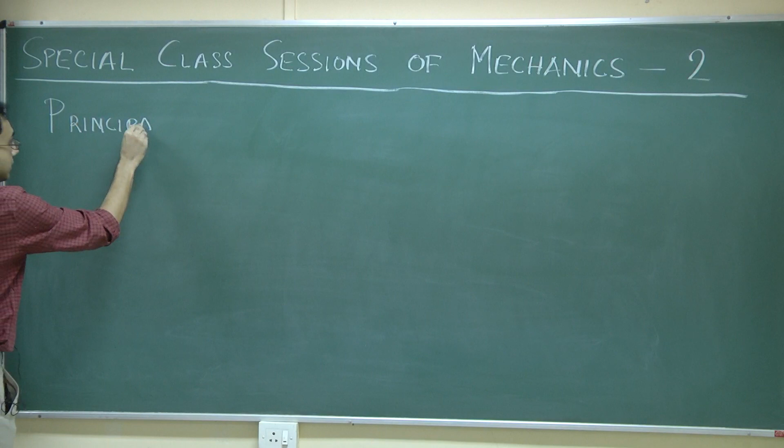Going forward, we'll talk about transformation of stresses in that spirit, but one very special version of the transformation of stresses, which is usually referred to as principal stresses. So the first topic of discussion today is principal stresses. Very closely connected to the concept of principal stresses will be another topic called maximum shear stresses, so we will discuss that also.

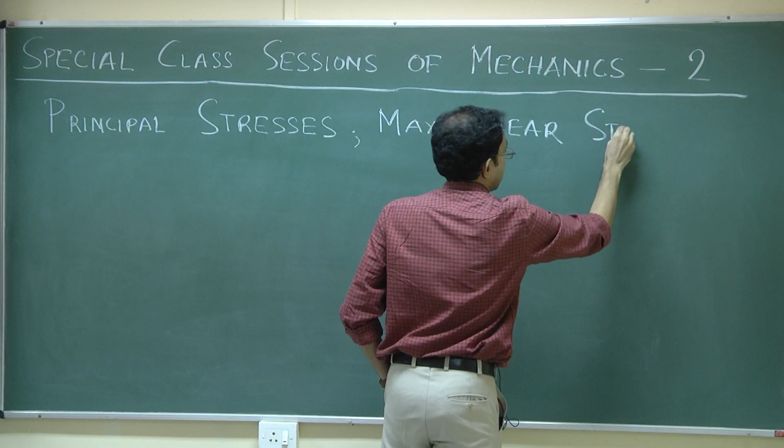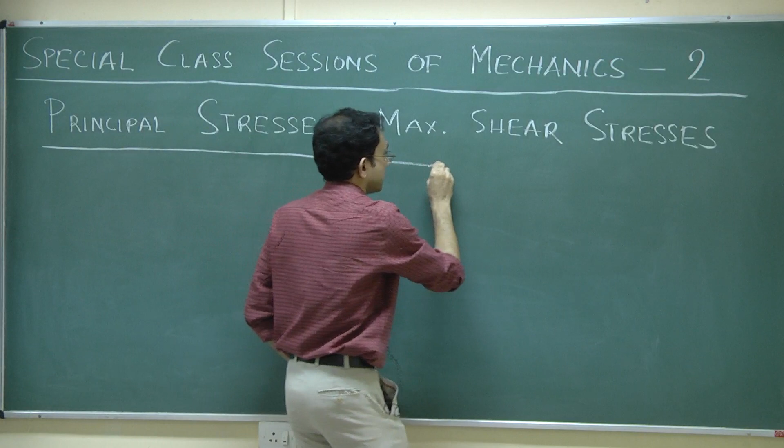Let's see how much we can finish in this first hour, after which we'll take a short break and then continue as required.

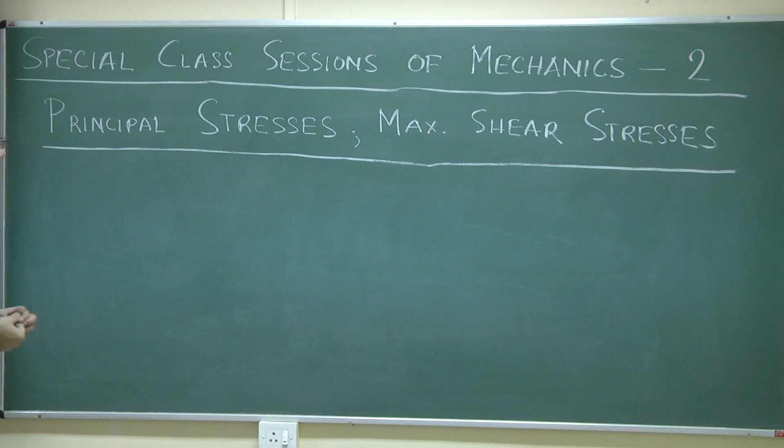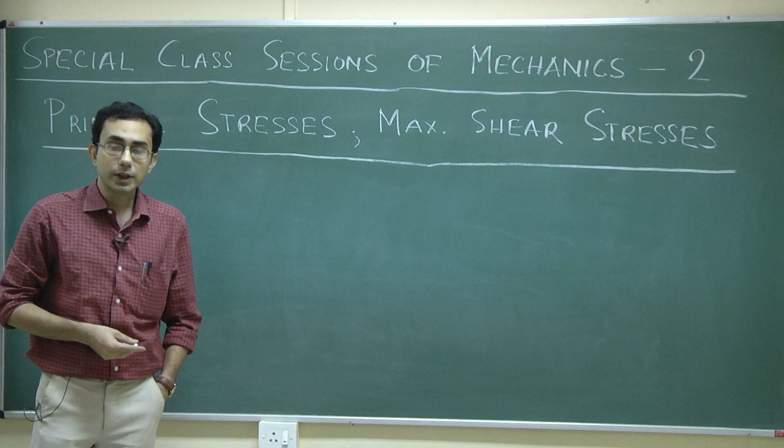Regarding principal stresses, what we are going to do is carry forward the expressions we had obtained yesterday for sigma x dash, sigma y dash, and tau x dash y dash, and see what we can do with it. For our purposes today we will not directly need the expression of sigma y dash. So effectively what we need is equation number 3 and equation number 4 that we had obtained yesterday.

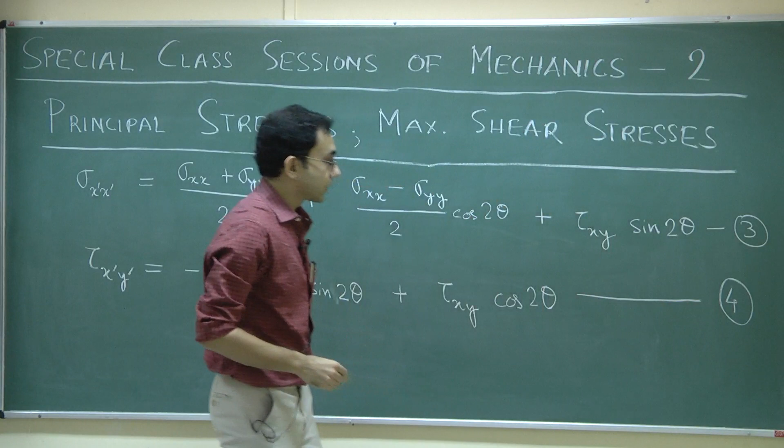Please note that the first of these equations we had numbered as equation 3, and this one as equation 4 yesterday, so these equation numbers are from yesterday. I believe the technical people from the Center for Educational Technology will provide the links in this video for that lecture also. So now what we are going to do is a little bit of manipulation.

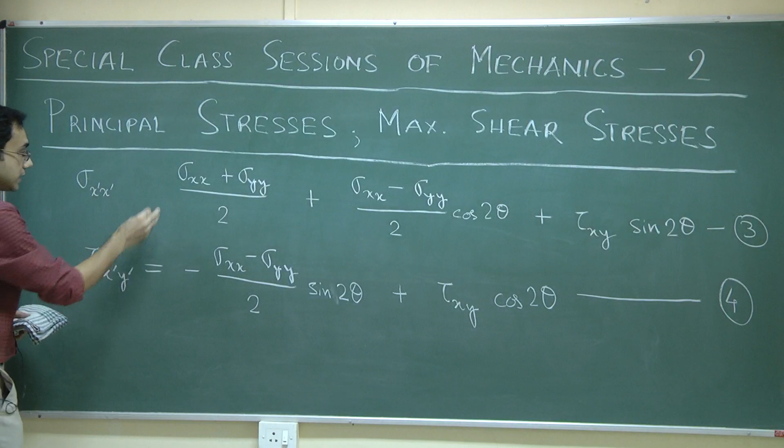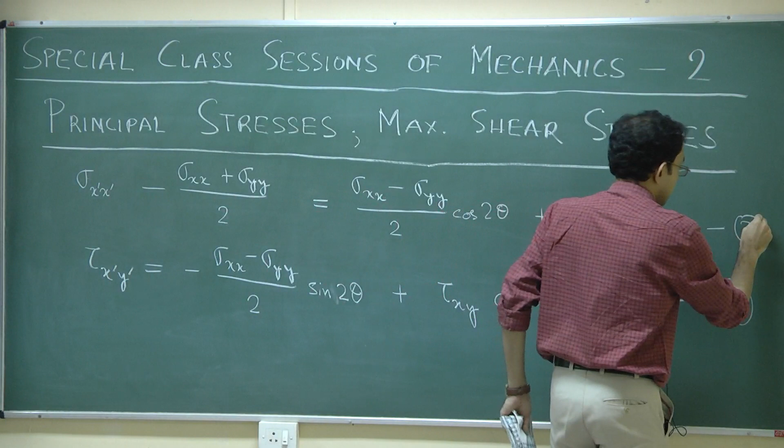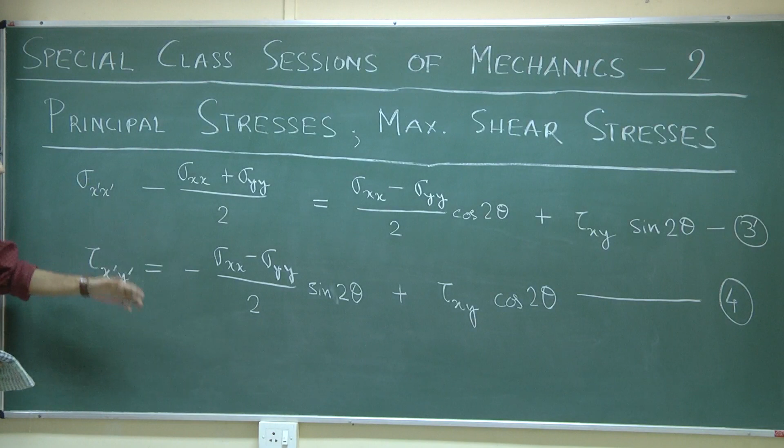You see, I can easily transpose the sigma xx plus sigma yy by 2 term to the left hand side. If I do that and do a little bit of algebraic manipulation, I can obtain something very insightful. So I will transpose this to the left hand side, name this as equation 3 dash just to distinguish it from the previous version, and then I will square equation 3 dash and also square equation number 4 and see what I can obtain. So this is the plan.

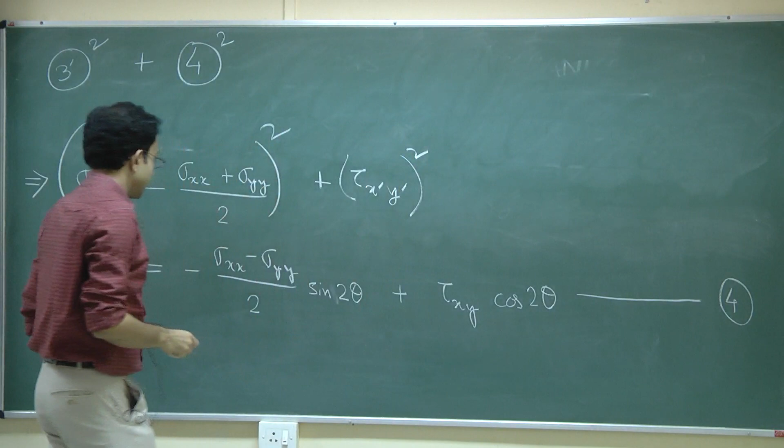So that gets squared, and what I will also obtain is this thing squared. On the right hand side I should obtain sigma xx minus sigma yy by 2 cos 2 theta plus tau xy sin 2 theta, the whole square of that, and then this entire thing is also whole squared.

We do not have to number this intermediate equation. Now all I have to do is a little bit of algebraic simplification on the right hand side. These two terms will give a sigma xx minus sigma yy by 2 whole square, but very nicely I am going to obtain a cos square 2 theta and a sin square 2 theta, so together that will reduce very nicely.

So instead of discussing this orally, let me quickly obtain the expression. I may have to reduce the font size of my writing a little bit to adjust within the limited space of this board.

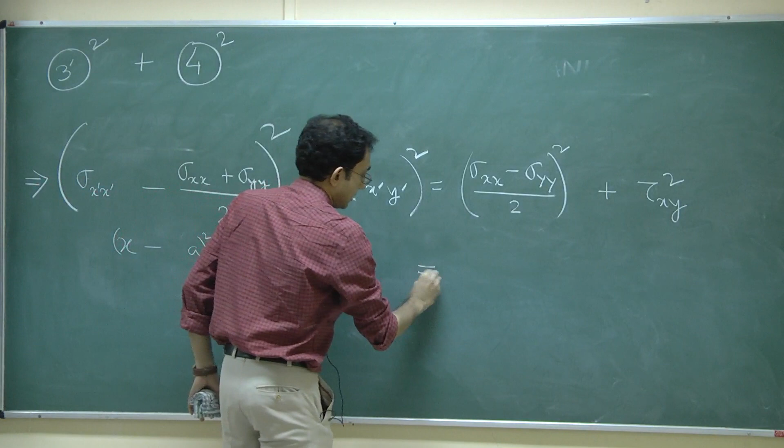Suppose I imagine that this is like x, and this is like y. Then this is like x minus something whole square plus y square equal to something on the right hand side. So very faintly I can write this as x minus a whole square plus y square equal to r square. This is what I want to imagine this entire equation to be written as.

If we do that, then very quickly I realize that even though these are representations of something physical, some stress representations, somehow they have managed to come out in the form of a circle. So if they are really looking like a circle in terms of algebra, can we perhaps draw this circle and gain some more insights into it? The answer is yes, of course, and we will exactly do that.

To make the writing easier on the board, I will reduce my font size significantly and just repeat this entire equation in somewhat shorter form.

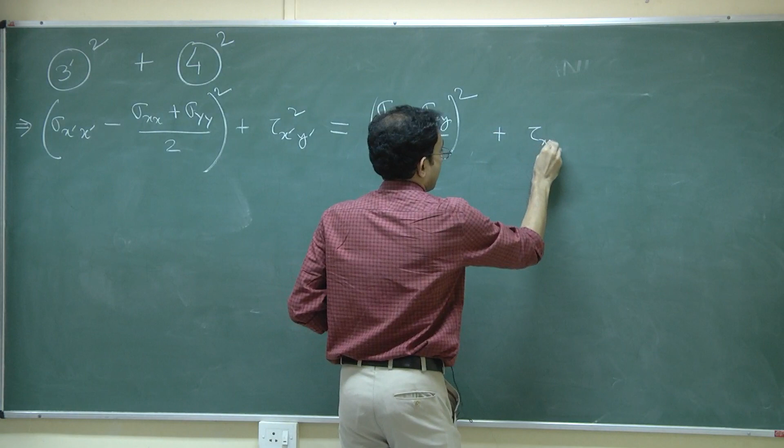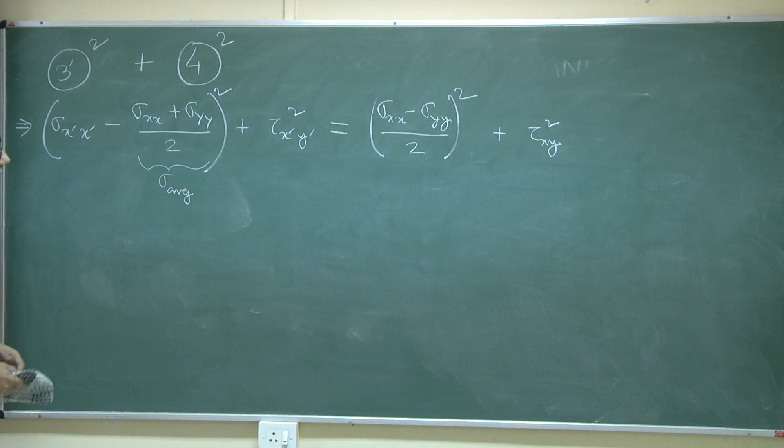What I will do is write this as sigma average, and it really makes sense because this is some sort of an average of sigma xx and sigma yy, the two normal stresses we have in our reduced two-dimensional plane stress situation. So this is our sigma average. What we will do here is call this r square, r denoting some sort of a radius. Now let us actually draw this diagram.

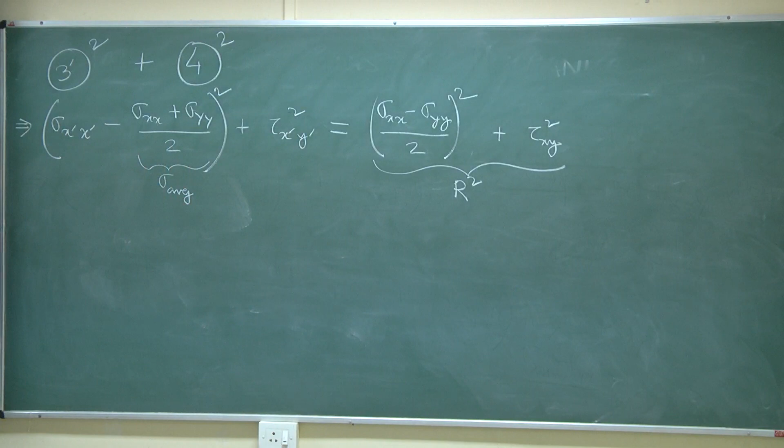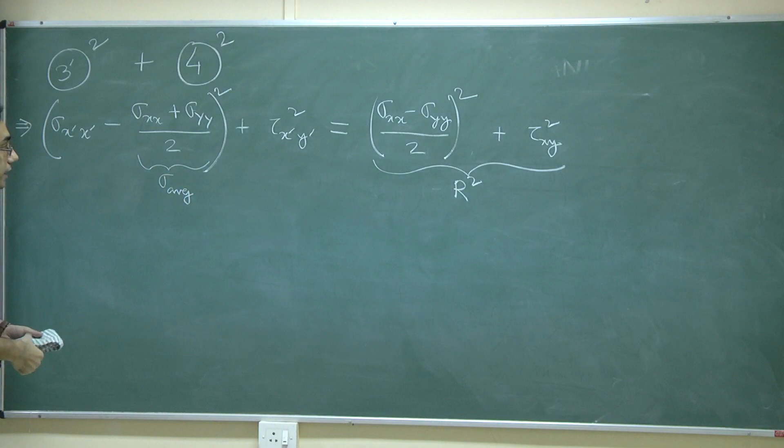As I mentioned earlier, my plan is to treat sigma x dash as my x and tau x dash y dash as my y. So in that spirit, let me draw this circle.

Now when I draw this circle, you may think whether it should be centered here, or here, or here. Well, I do not know, because right now I am not doing any particular problem, so I do not have in hand any particular value of sigma xx and sigma yy. When we do certain problems later on, we will see that it makes some concrete sense. Right now we will keep this as general as possible. So it does not really hurt us if we consider that perhaps this entire value is something positive, so that we might as well consider the center to be on the right hand side of the origin, and we will draw a circle here.

Believe it or not, this is supposed to be a perfect circle. Please assume that this is a perfect circle. So this is sigma average, and the radius of this circle, we understand, is like this.

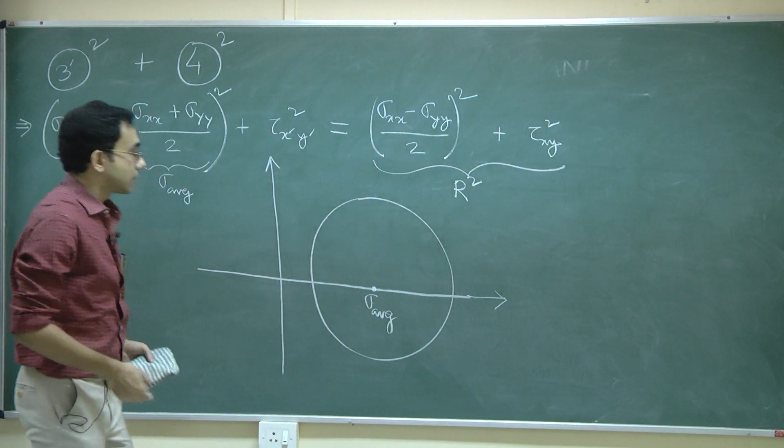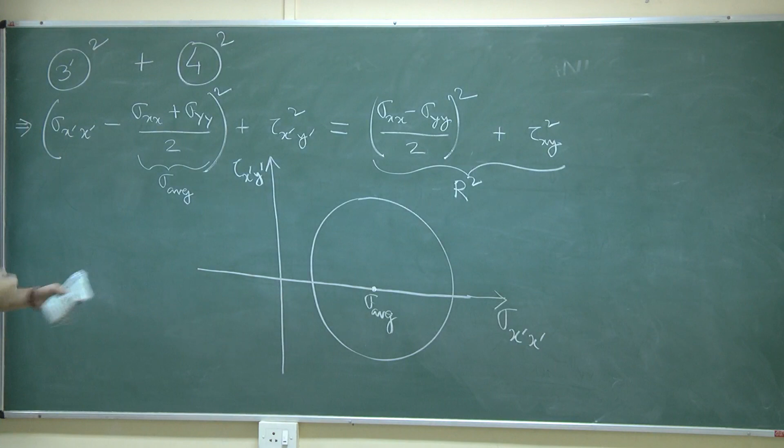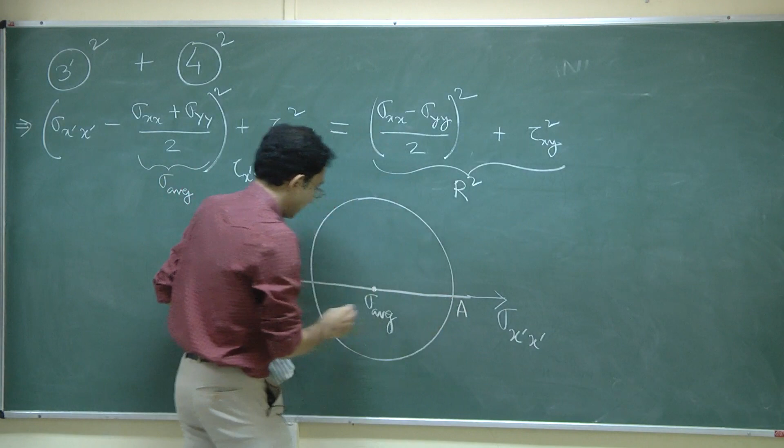Now directly from this picture we can obtain a number of insights. First of all, you see that this circle is cutting the x axis, which is the sigma x dash axis, at two points. This is one of these points, this is another point. We will call this A, this we will call B, and the center we will call C.

Now, when I am sitting on point A or point B, I am actually addressing a very special situation. What is that special situation? This is my sigma x dash axis, but if you consider the tau x dash y dash axis, the value of tau x dash y dash at A or at B is equal to 0. I emphasize once more that at A or at B, the value of tau x dash y dash is equal to 0. Now this is a very special situation.

Why? If you consider this entire circle and the various possible values of sigma x dash that are possible on this circle, as long as you stay on this circle, what is the maximum possible value of sigma x dash? Is it here? Is it here? Or is it perhaps here? The answer, of course, is that the maximum possible value of sigma x dash is here. Similarly, the minimum possible value of sigma x dash is here.

So we have two new insights here. First, at A and B we have tau x dash y dash to be 0, and specially, whenever tau x dash y dash is equal to 0, we also have sigma x dash taking on the maximum value here and the minimum value here. So together we can say that A and B represent the extreme values of sigma x dash.

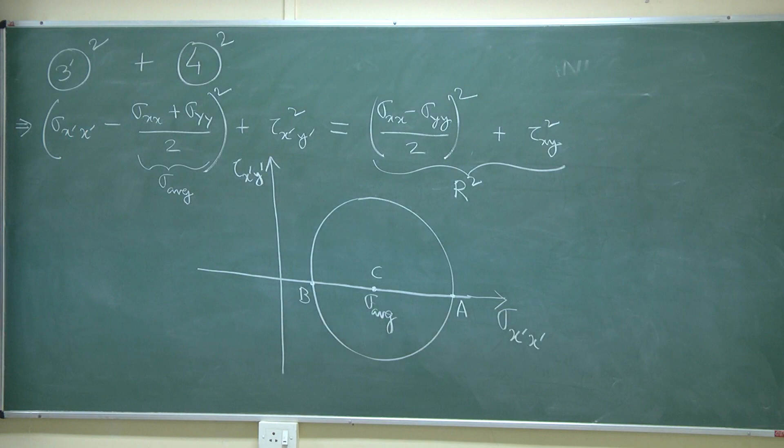So, in terms of expressions, how does this new insight help us in going forward? We will keep this diagram as it is and go on to the other side to obtain some expressions.

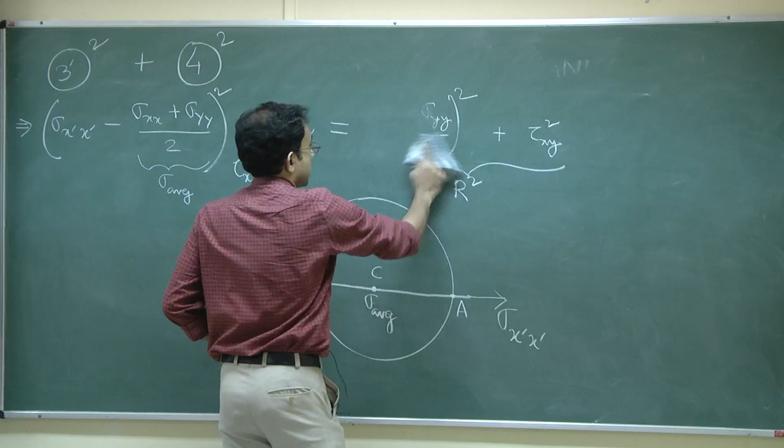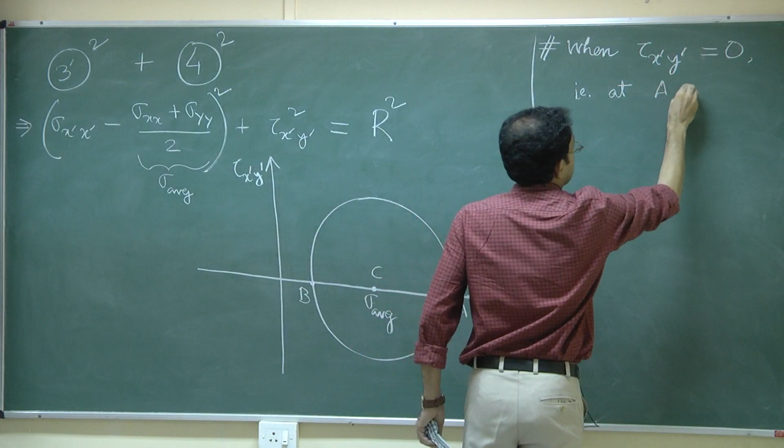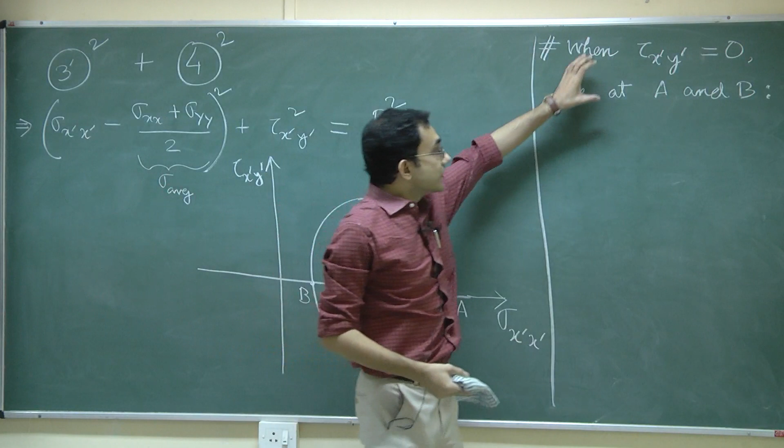So, first of all, you note when tau x' y' is equal to 0, what do we have? Well, one quick thing which we can check is what happens if we actually go to the expression of tau x' y'. So, let us write that down quickly. So, tau x' y' was

this thing. So, basically what I have done here is to rewrite equation number 4 from earlier. Now, we are considering this very special situation, which means that this is equal to 0. If that is so, then can I not write from this expression directly that tan 2 theta is equal to... All right. Now, you all understand that this is a very special case of this angle theta.

So, what are we doing? We are considering the special case that tau x' y' is equal to 0. All of this discussion pertains to these 2 points A and B. Now, you note that the very topic of our discussion was named as principal stresses. So, what are these principal stresses? The sigma x' x' values that we have at A and B, these are basically referred to as the principal stresses.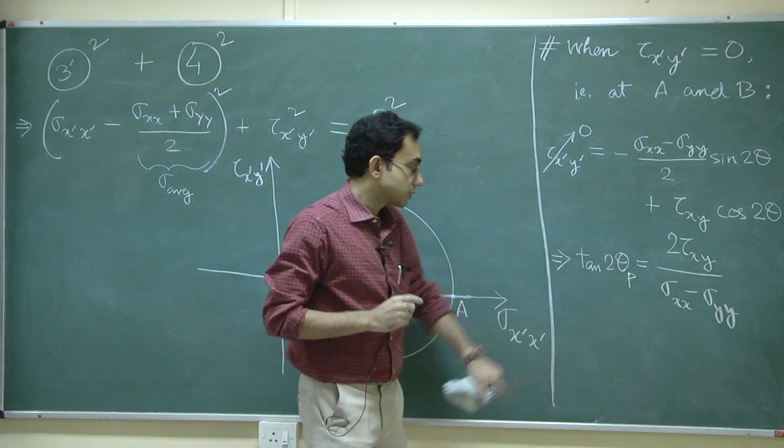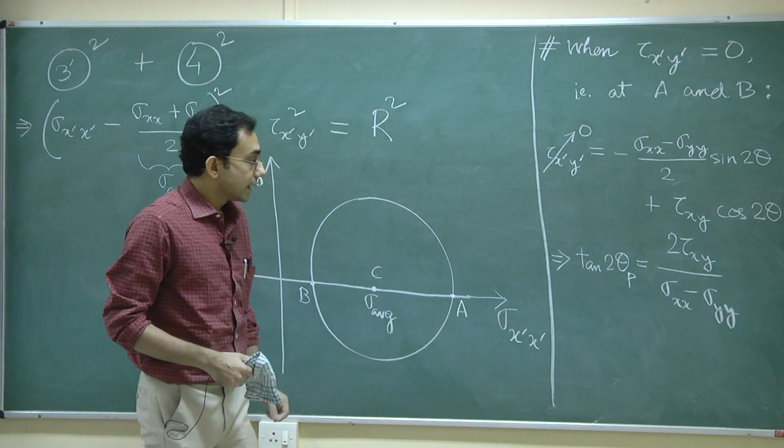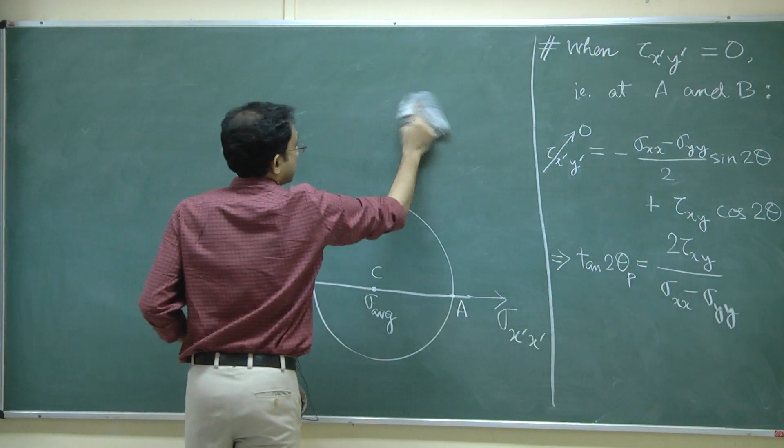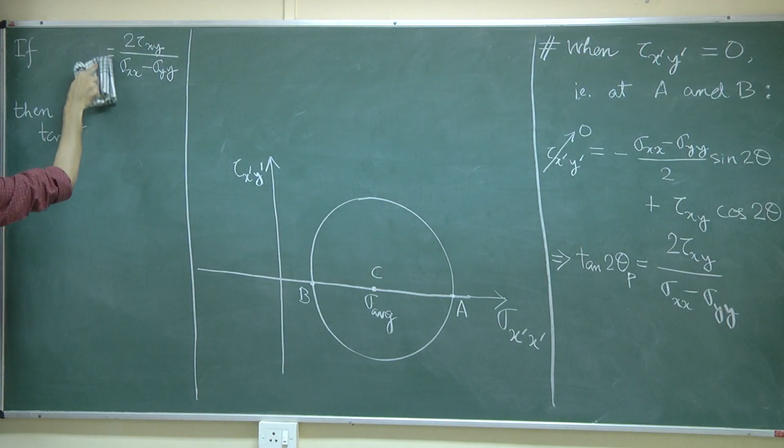Alright. Now you see, suppose we are actually doing a particular problem, and at a particular point we have certain values of tau xy, sigma xx and sigma yy as referred to a particular set of coordinate axes. Now, using your calculator, you can certainly find this value of theta p, but we also know from our high school geometry that if a certain value of twice theta p satisfies this equation, then twice theta p plus 180 degrees should also satisfy this very same equation. Now, if that is so, we can write this down very neatly. Effectively, what we are saying here is that to solve this equation, you have two choices of theta p.

So, both of these are valid solutions. If that is so, can we not equivalently write that our valid solutions are theta p and theta p plus 90 degrees? So, theta p is one solution, equivalently theta p plus 90 degrees is also a solution which is going to satisfy that equation. Now, what does all of that mean?

Before we can actually go into an interpretation of the meaning of these angles, you note that it was absolutely necessary that we obtained two different values from this equation. Why? Because when we are considering this particular thing, we do not only want to obtain one principal stress at A, rather we want principal stress at both A and B. Then surely the two solutions that we are obtaining here, that is theta p and theta p plus 90 degrees, must somehow pertain to A and B. Only one of them is not going to give us the correct answer. Okay, so we understand that much, that theta p and theta p plus 90 degrees must pertain to A and B. Now, does it really make sense with whatever we were discussing?

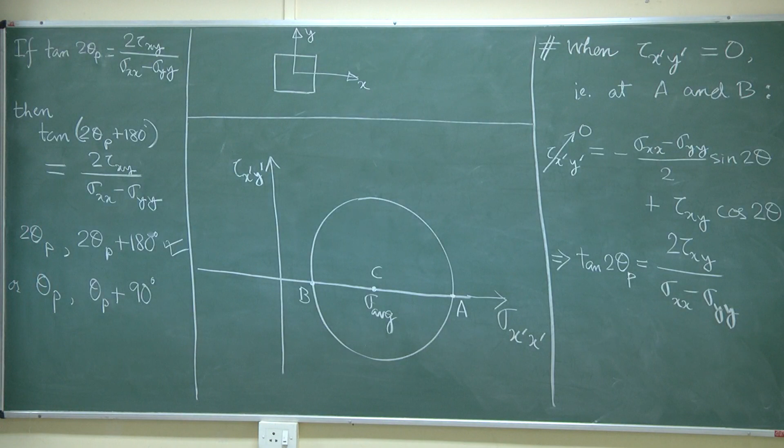So, if you forget about this particular circle for one moment and just think about the diagrams that we were considering yesterday. Yesterday we were repeatedly considering this kind of a square stress element, and what we said was that this pertained to a particular reference axis or coordinate axis like x and y, and we considered a rotated coordinate system x' and y', and corresponding to that we had our square in this fashion. Sorry, this is a horrible picture.

So the white one here, the straight white one, that corresponds to x and y, and this tilted one, the blue one, corresponds to x dash and y dash. And we said that this angle was theta.

Now what we are discussing today is a special value of that theta in terms of this theta p. So what we are saying is that maybe when we are considering this kind of tilt, at that particular value, the tau x dash y dash comes out to be 0, and at that situation we have this special value of sigma x dash x dash. But we are also simultaneously obtaining theta p plus 90 degrees. Where is that theta p plus 90 degrees?

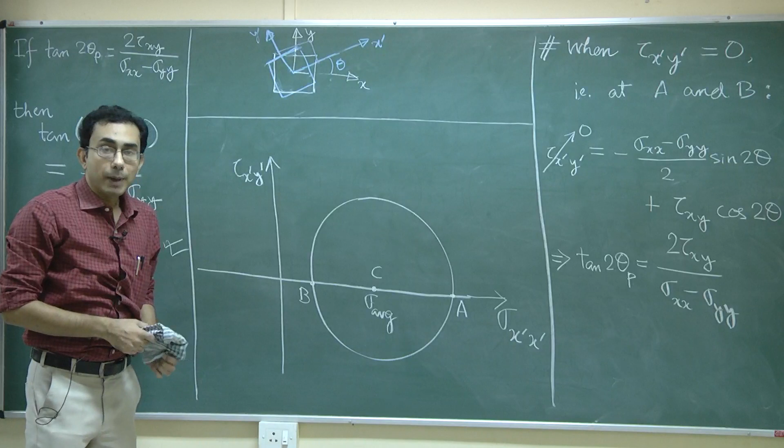Before we go into more details about that, let us look at something insightful regarding the maximum value of the shear stress. Coming back to this diagram, you see that this is our tau x dash y dash, which is the shear stress.

Just like previously we were considering various possible values of sigma x dash x dash, this time we are not going to bother about the normal stress, we are going to focus on this. Now as you move along this circle, you sit at various points on the periphery and note down the various values of tau x dash y dash.

Where on this circle will you obtain the maximum possible magnitudes of this tau x dash y dash? Mark my words carefully. Is it here? Is it here? Is it here? Where? Certainly from looking at this circle, we can understand that it will be vertically up from this C point. So at this point.

Let's call this as D. Another possible value, because remember we are only talking about the magnitude of tau x dash y dash, will be just below this thing. So at the two opposite ends of a vertical diameter, we have the maximum possible magnitudes of the shear stress. Here we have the maximum possible magnitude and here we have the maximum possible magnitude.

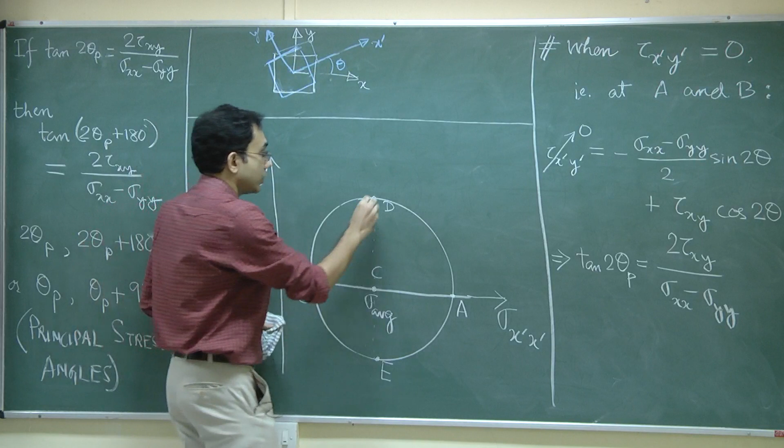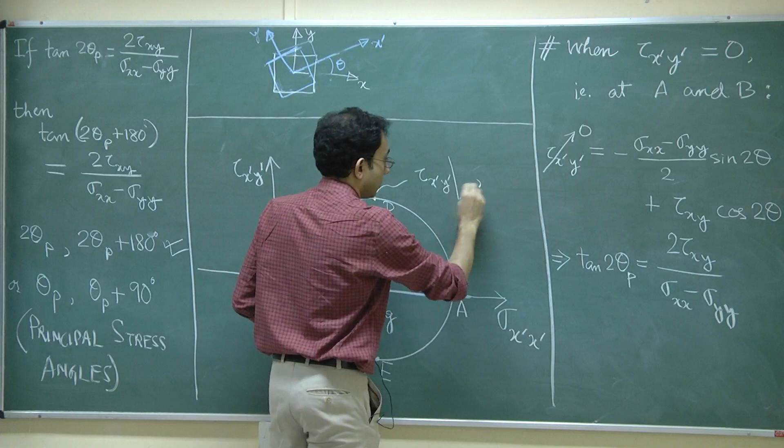It is certainly not 0. That would have been at the origin. We are not sitting at the origin. So this one has the abscissa value, the x coordinate value, as this sigma average. So what we can mark this point as is tau x dash y dash max comma... sorry, it should be the other way around. So these are the coordinate values of the point D.

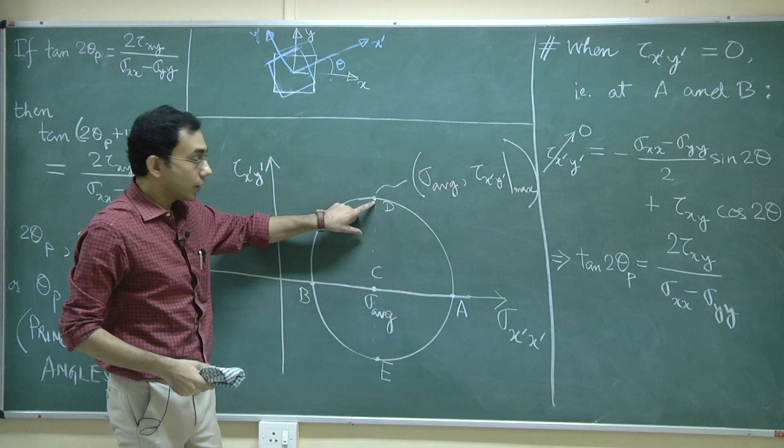Similarly here you will have the negative counterpart of it. More importantly, at E also you will have the abscissa value as sigma average.

Now just as we had done this exercise where we were able to find out the angles pertaining to the principal stresses, can we perhaps proceed with a similar strategy to find out the values of the shear stresses? So what could be the possible strategy? Let us take a direct inspiration from whatever we did earlier.

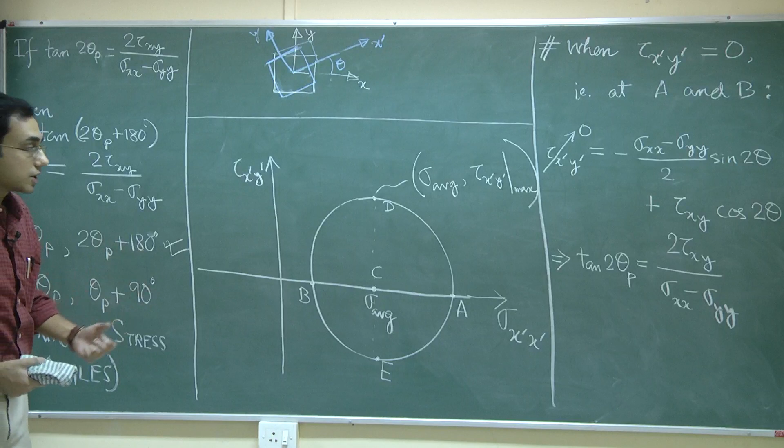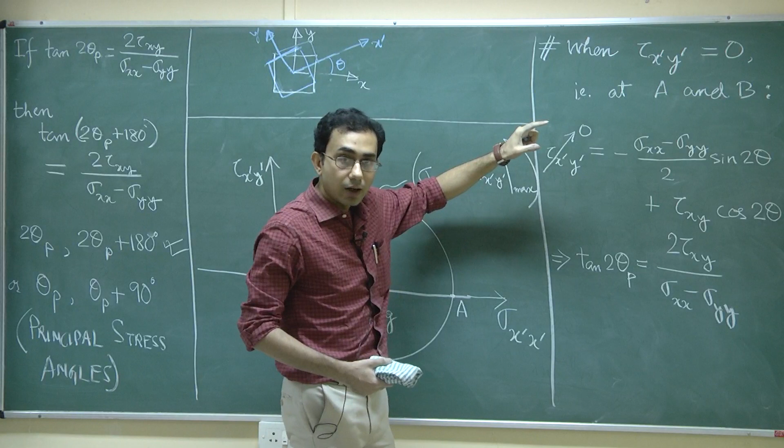To recap briefly, when we were considering the case of principal stresses, we did not consider equation number 3, rather we considered the other equation, the one for shear stress. Now we are interested in finding out the maximum value of the shear stress. So in a similar fashion, we should not be looking at the equation for shear stress, rather we should be looking at the equation for normal stress, which means equation number 3.

So let us get back to that equation and try to find out what are the angles that pertain to the maximum possible values of the shear stresses.

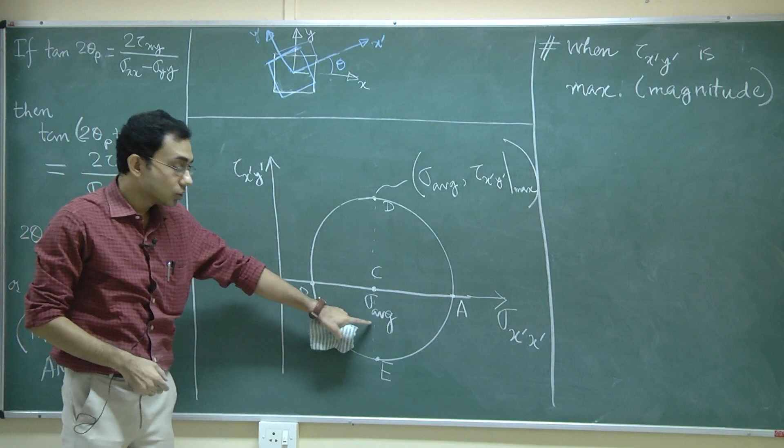When tau x dash y dash is having the maximum magnitude, then we have already noted that the value of sigma x dash should be equal to sigma average. Let us use that information by substituting it in equation number 3. All right, so we'll use equation number 3.

I have basically rewritten equation number 3 here. All that I have to do is substitute the sigma average on this left hand side.

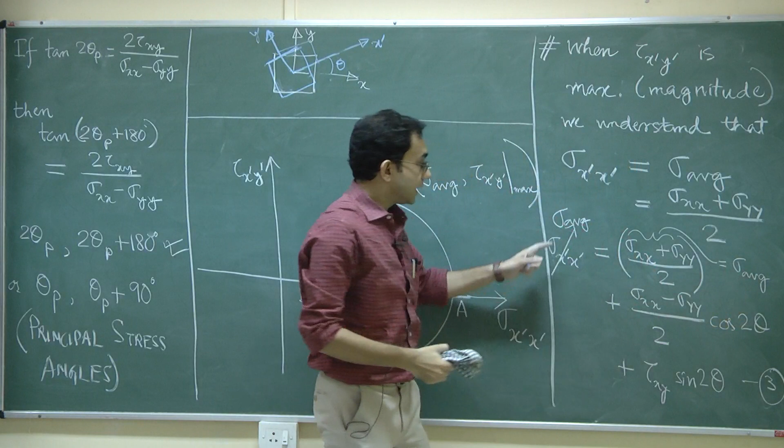You quickly note that sigma average is nothing but sigma xx plus sigma yy by 2, and that is nothing but this first term on the right hand side. So this entire thing is equal to sigma average. So on the left hand side you have sigma average, and on the right hand side you have sigma average as the first term. Both of them cancel.

So if we proceed after cancelling, what are we going to obtain? We proceed from the right hand side, cancel the sigma average from the left hand side and the right hand side, and simplify that in terms of dividing by cos 2 theta also. So we obtain tan 2 theta, let me borrow a little space from here.

So this tan 2 theta will be equal to minus... alright, so we have this new expression for tan 2 theta.

But again, note this is not some general theta, this is the theta corresponding to the maximum possible magnitude of the shear stress. So perhaps we should name this theta in a particular way. Earlier we had used the subscript P to refer to the principal stresses; here we will use the subscript S for maximum shear stress.

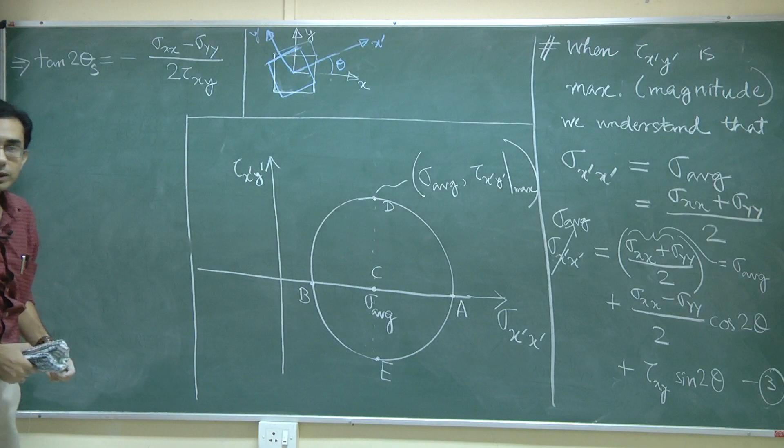Now, whatever we are going to discuss from now on will be exactly like the tan 2 theta p case. There also we had found that tan 2 theta p is equal to something, and if that something has a particular numerical value, then we have two possibilities of theta p. In exactly the same fashion, when solving a particular problem, this will have some particular value, and correspondingly we will end up with two possible values of theta s.

So both of them are valid solutions. Exactly analogous to what we discussed earlier, it was imperative for us to obtain these two values. Why? Because whenever we are talking physically in terms of the requirement of the maximum shear stress, we end up from this diagram at two possibilities, this D and this E. So the angles we are obtaining should also refer to two possible solutions.

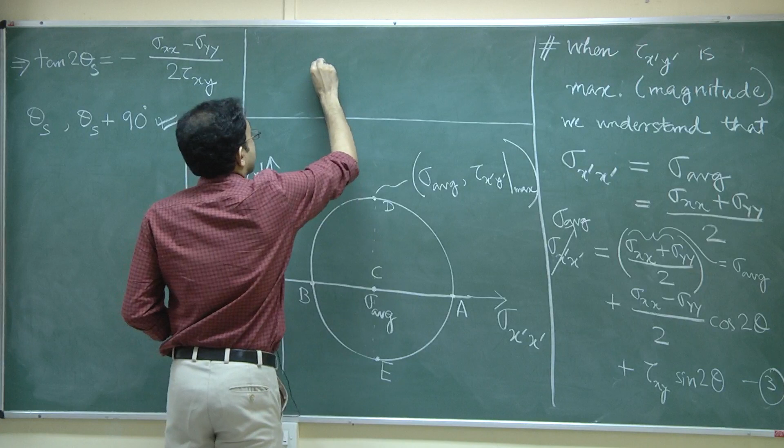Now can we look at this diagram and see what that is? Well, the answer is quite simple. I need not unnecessarily clutter this diagram by drawing the blue square. If I have this kind of figure and I am saying that on this figure the value of the shear stress I obtain is the maximum shear stress, this one, then I must necessarily have a complementary shear present on the top surface, which is like this.

And of course, to complete the entire diagram, I need these also. So the answer we will obtain as far as the maximum shear stress requirement is concerned, we will obtain this and this.

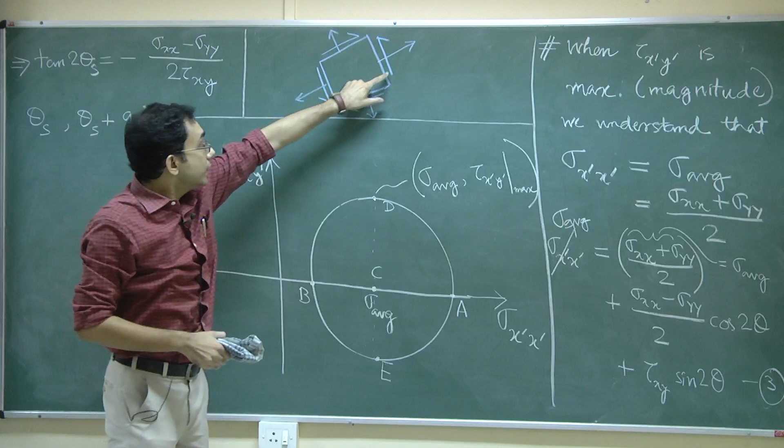He has suggested that although I have not depicted a number of things here, in order to avoid any confusion I should be depicting that we definitely have these things. It should not occur to our mind that when we have these maximum values of the shear stresses, these normal stresses are absent. It is not at all true, as we can see here, this is the sigma average value.

Now going forward, can we perhaps extract a few more pieces of insightful information from this diagram? The first thing we want to find out is that when we are sitting at various different points, not necessarily the points pertaining to the principal stress or the maximum shear stress, any general point, what do they represent? They represent the values of the stresses that will be possible as we keep rotating our little stress element. So these are all the various possibilities.

What do they correspond to in terms of the discussions we had yesterday? They correspond to various different choices of our x dash y dash axis. Alright, now we are absolutely free to choose those x dash y dash axis.

If we keep on increasing the value of theta, we get different values of sigma x dash and tau x dash y dash. Certainly the values are changing as we move along, but no matter what you do, this is very much a circle. It remains a circle no matter where you are sitting.

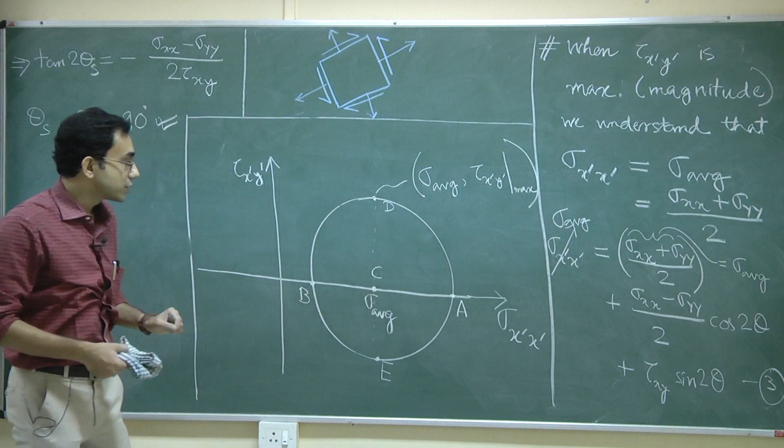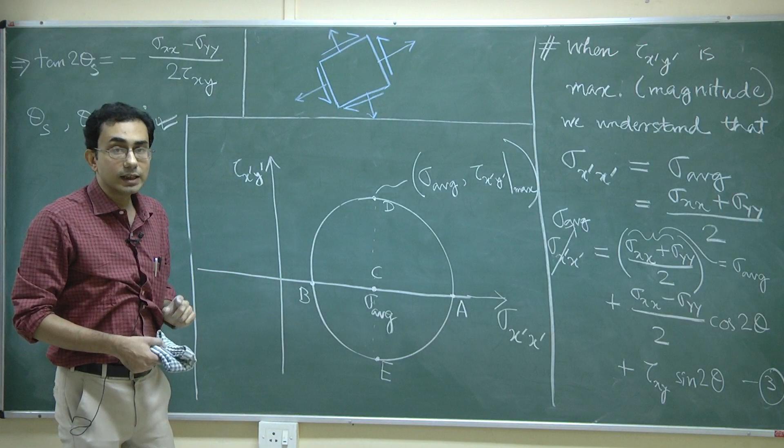It is almost trivial to note it, but it is not so trivial to note that no matter what value of theta you are considering, it must be absolutely true that your radius is not changing, which means if we look at the expression of the radius, so we erase all of this thing.

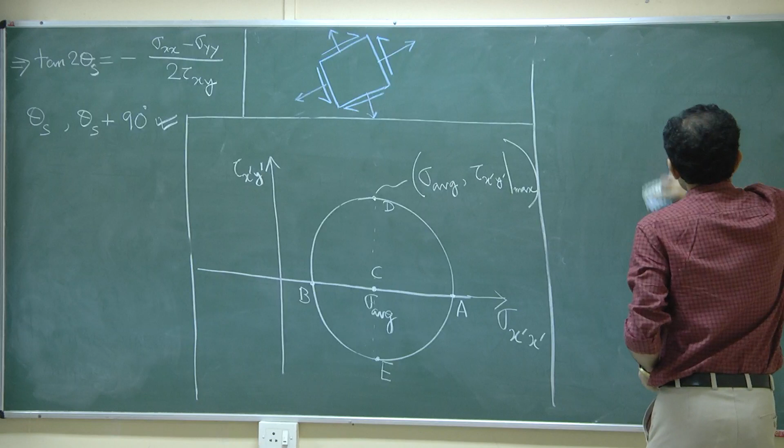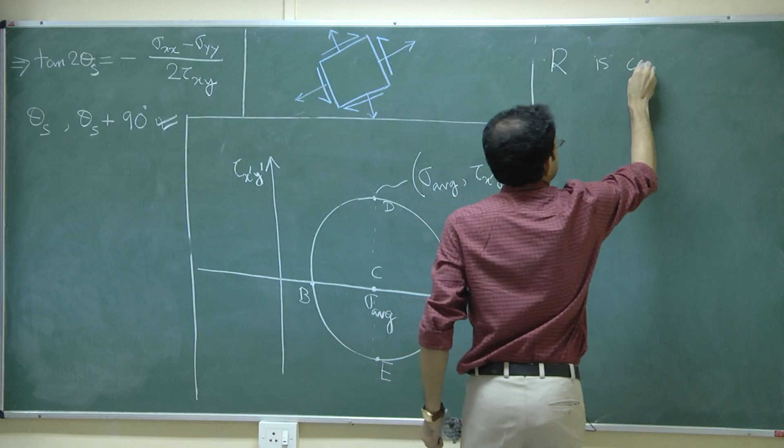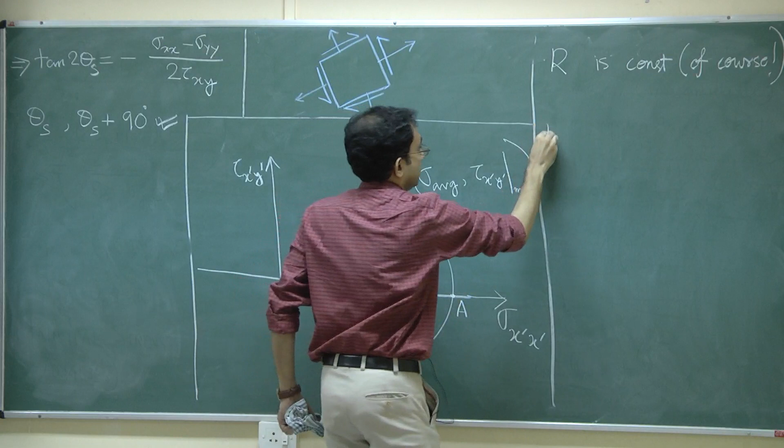R is constant, of course. R is equal to this. Now, when I am sitting at different points on this circle, I am obtaining various values of sigma x dash, tau x dash y dash, and correspondingly some value of sigma y dash also. If I substitute all those values, sitting at any arbitrary point on this circle, it must be true that this R does not change.

What does that mean? It means that no matter what the state of stress may be represented by in terms of my mathematical machinery, this R is an invariant value. I repeat, no matter what the particular combination of sigma xx, sigma yy, tau xy may be, as I am sitting at different points of this circle, this R is an invariant value.

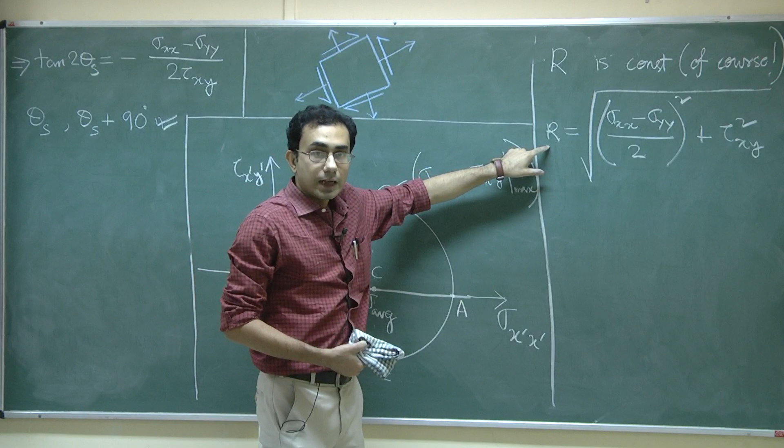Now remember, at one point in yesterday's lecture, I had mentioned this important fact that sigma xx plus sigma yy is an invariant. Why is this an invariant? Because if you refer to somewhere near the end of yesterday's lecture, as Professor had pointed out, if we sum up equation number 3 and equation number 5, what we obtain is this.

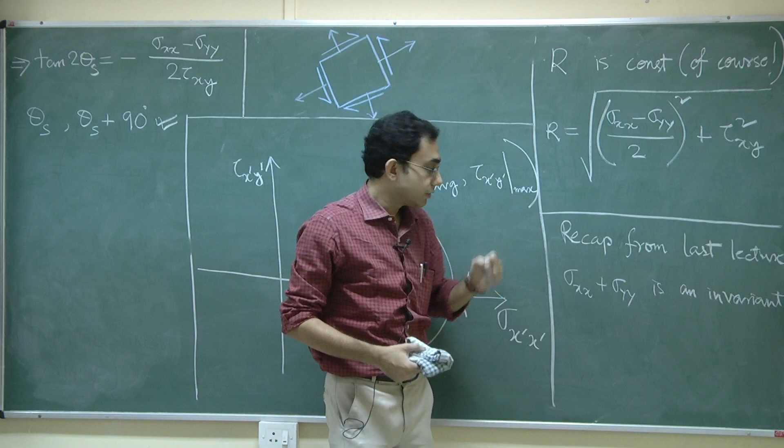Please note that this does not at all depend on the value of theta. No matter what value of theta you take, this thing is going to be true, which means that this is like a universal truth.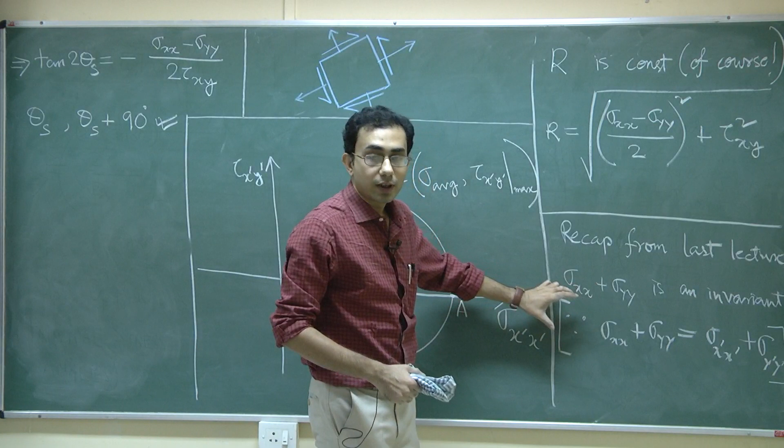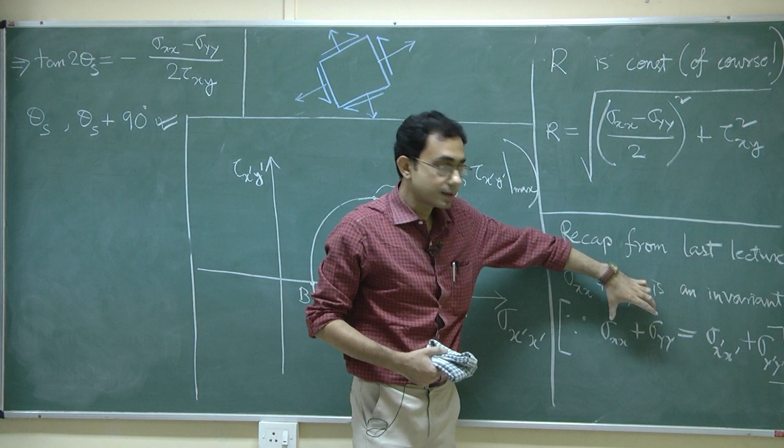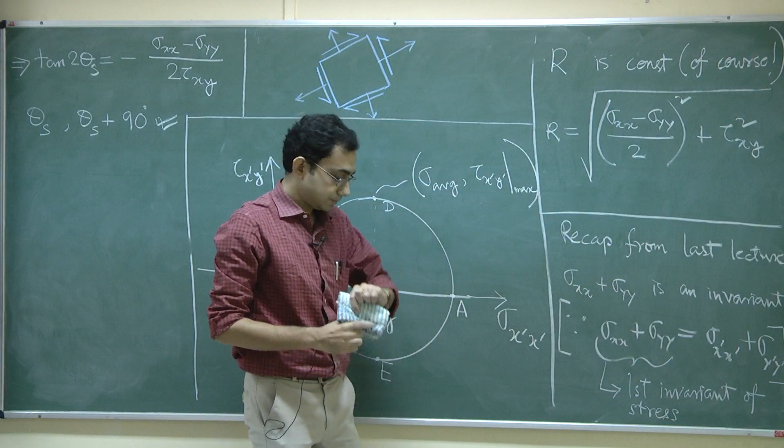What is very important to note is that in the rich literature of mechanics of materials or mechanics of solids, this particular combination of sigma xx plus sigma yy, especially when we are talking in terms of 2D stresses, will be referred to as the first invariant of stress. You can as well say that this is the first invariant of stress, because the result is absolutely the same.

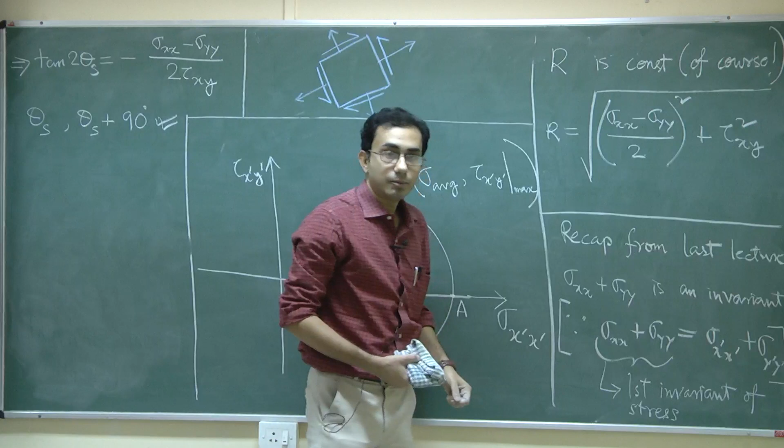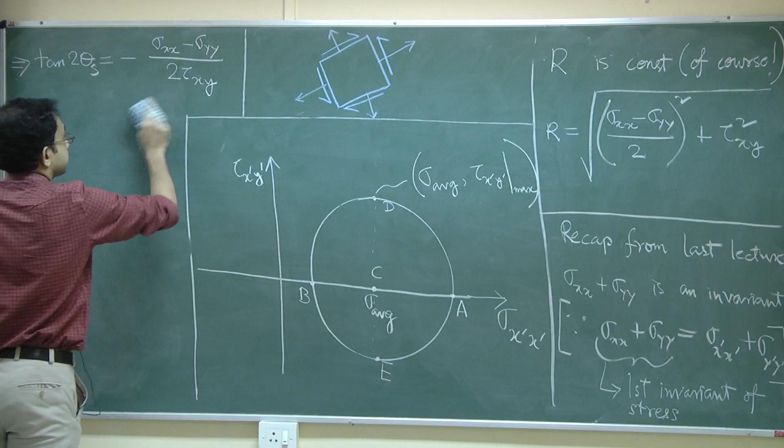Now, it is a very big temptation for us to say, then what kind of invariant is this? Well, in the traditional literature of mechanics of materials and mechanics of solids, the second invariant is actually something else, which I'll just quickly note down. This particular combination will also turn out to be an invariant value no matter what combinations of sigma xx, sigma yy and tau xy you are taking.

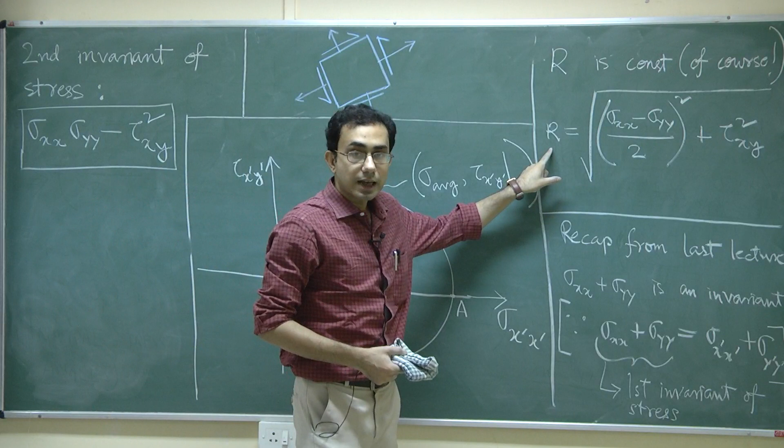Now the question is, is it perhaps possible to express this R somehow by combining this first invariant of stress and this second invariant of stress? So this is my little exercise to you. Please note it down: express R in terms of the first and the second invariants of stress. This is basically an algebra problem that I am giving to you. This is not part of the tutorial sheet. This is something extra that we are discussing.

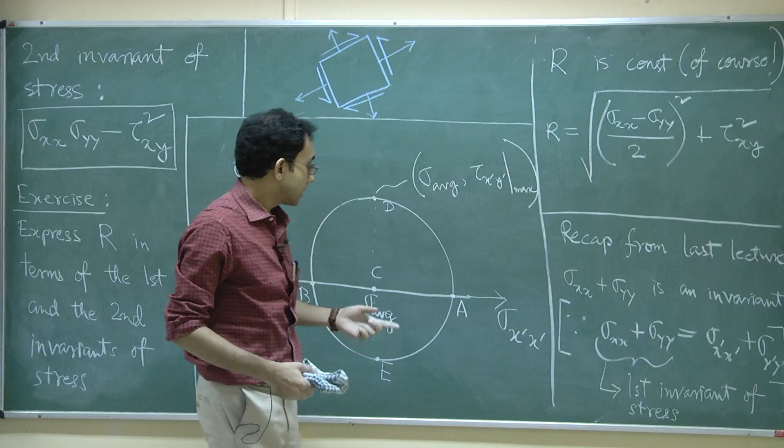We are going to go for a little break, but before that, I would like to part with one discussion. We have been talking about the radius, an essential requirement of which is that it should be an invariant, because it has to be a constant. If we are talking about the definition of this circle, in addition to the radius, it must also be true that no matter where you are sitting on the periphery of this circle, the center of the circle is also not moving around. It certainly cannot. It's almost trivial to say that.

But if that is so, then this center must also be an invariant, and you see that this actually is true, because this sigma average is actually sigma xx plus sigma yy by 2. Sigma xx plus sigma yy is itself the first invariant of stress, so definitely half of sigma xx plus sigma yy is also an invariant. So it is absolutely true that the radius is an invariant of stress, and the center is also an invariant of the stress. So everything makes sense here.

So after the break, what we are going to do is obtain some useful expressions of the maximum values or the principal values of the stresses and the maximum value of the shear stress, and we'll see what we can go on from there. Thank you.